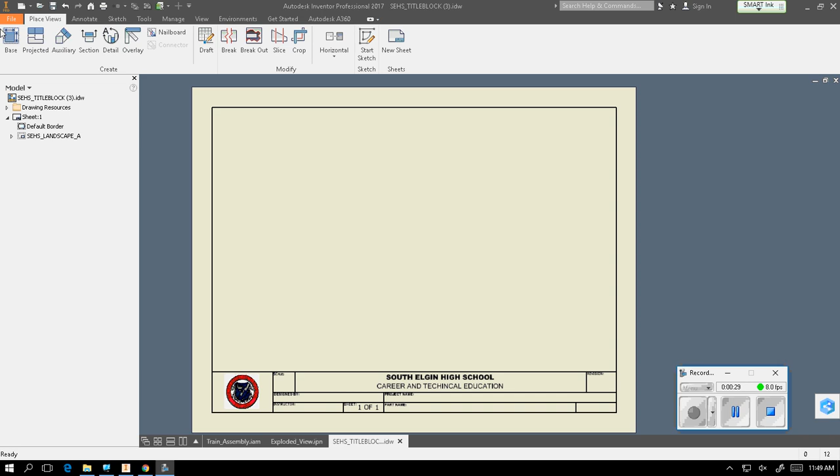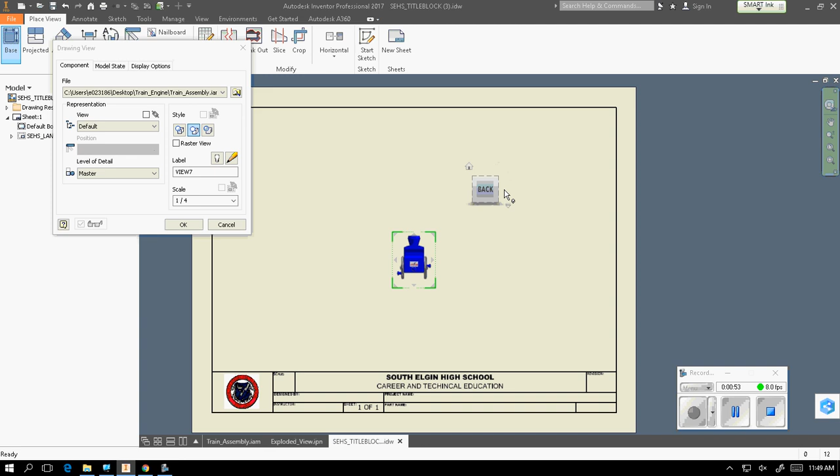So we want to start out with the full assembly first. So I want to go to my base view, and I want to bring in my full assembly, and I am going to make this the front view, okay?

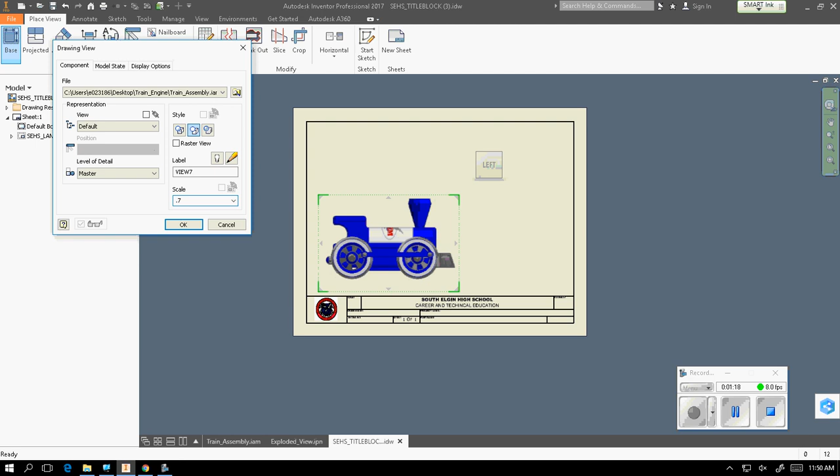And I'm going to change the scale to, let's go 0.75. Let's go 0.7. Yeah, that looks good. 0.6. Let's go 0.6 to 1. So I have my front, my top, my right-hand side, and then my isometric.

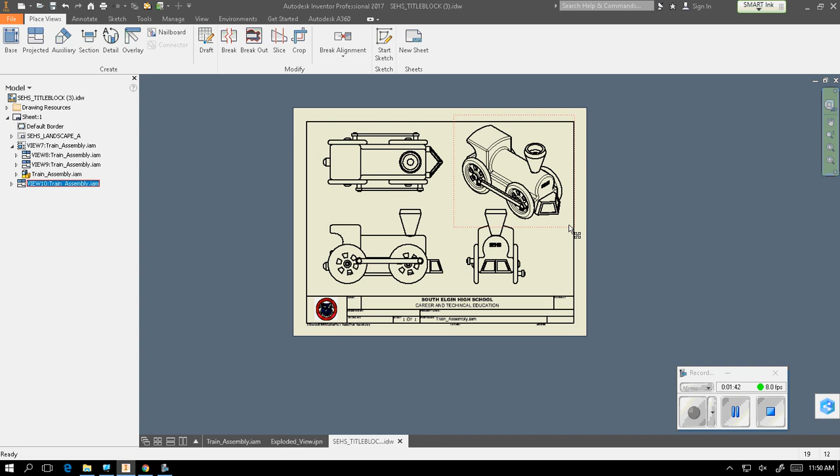And let's see, pull these guys in here so it's inside. And double click this. We want to shade all these views. And there's your full assembly.

Now, the text box did not pop open for this one, so I want to go in here and I want to add my text. December 11, 17. Name in caps. Project title is Train Engine. And instructor, go ahead and write my name.

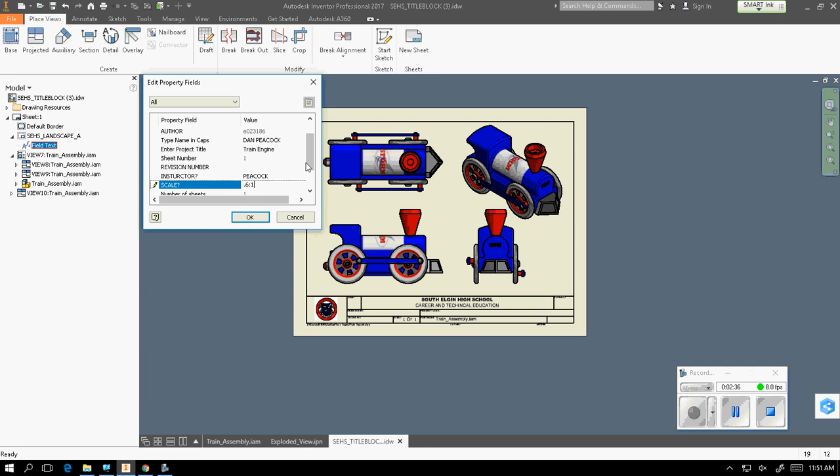And the scale we made was 0.6 to 1. Okay, so now we got all of our text in there. And now we want to go to the next new sheet. Same thing. Put your date. It's 12, 11, 17. Name. Project title. My name. And the scale of this next one, we're going to make that 0.6 to 1 as well.

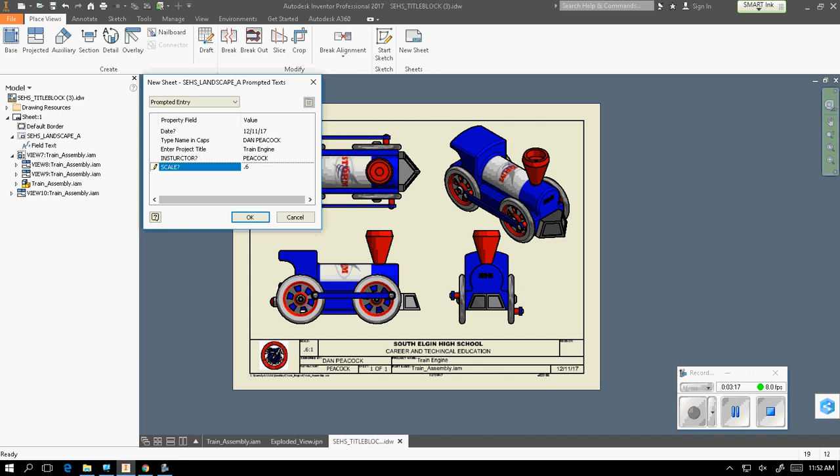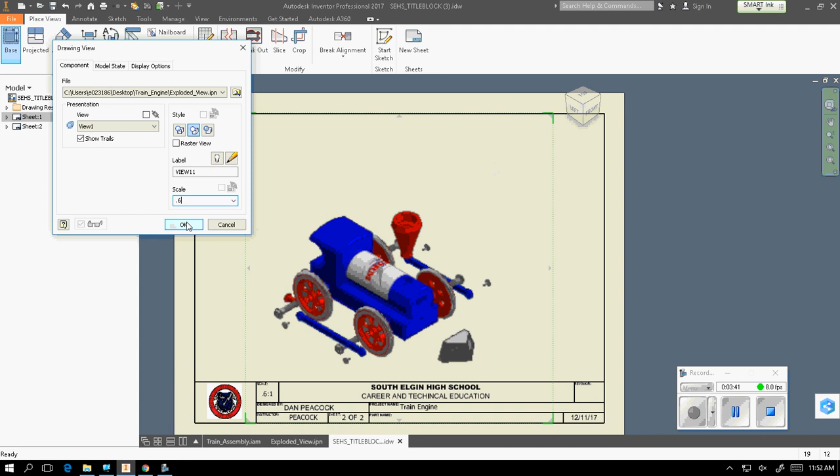Okay, the second one is going to be your exploded view. So I already have that guy here. We want to make it to where it is facing the other way, like that. Let's go 0.6 to 1. Double click, shade. Okay.

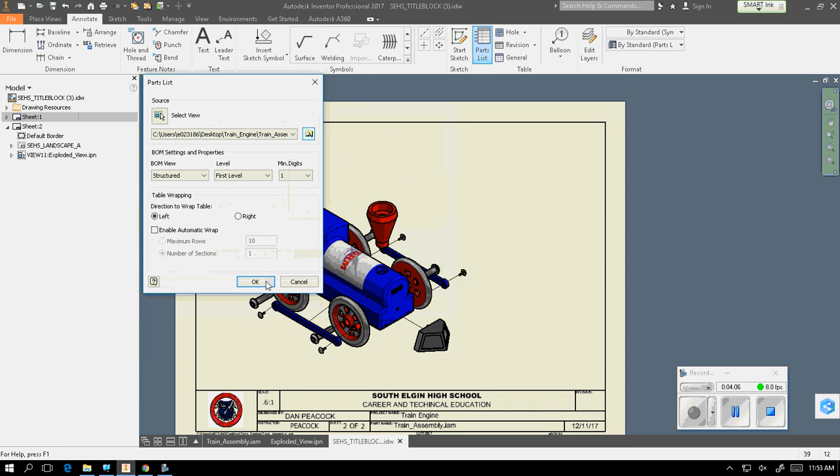Then we want to go to annotate, parts list, go find the presentation, exploded view, okay, put this up in the corner, and then we're going to go do balloons.

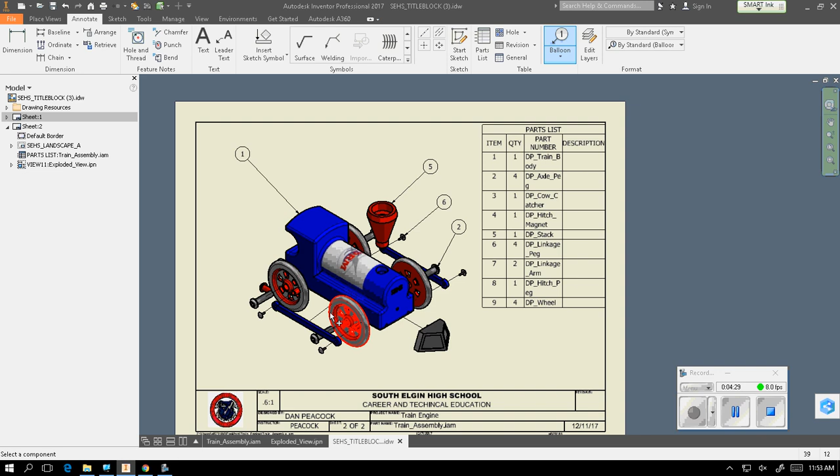So we need balloons for the body, the stack, linkage peg, axle peg, linkage arm, cow catcher, wheel, there's everything. You can't really see the hitch magnet very well, but that's okay. I could go in there and fix that and resave it. It's really not that big of a deal, though. I probably should be able to see it, but not the end of the world.

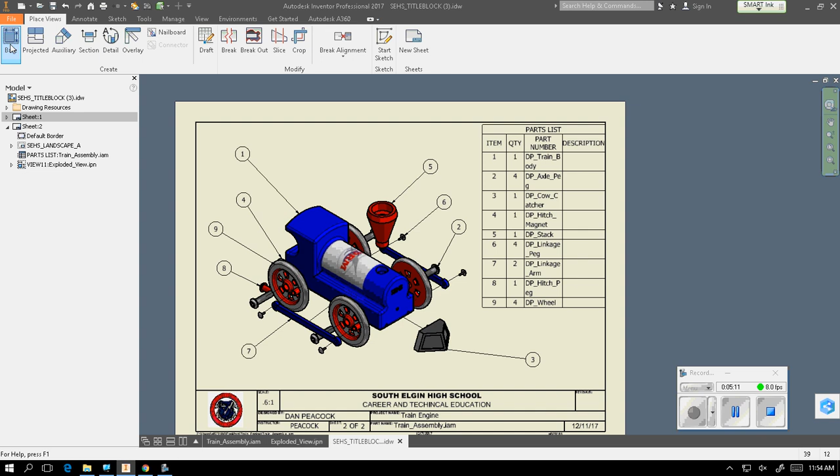All right, so now we want to go back to place views. Base view, we're going to start out with the body. So I want to go in here. Let's find the body. Open. Oops, sorry, I need to open a new sheet first. I know this is a pain trying to rewrite this every single time, but oh well. And the scale for this one, let's go 1:1.

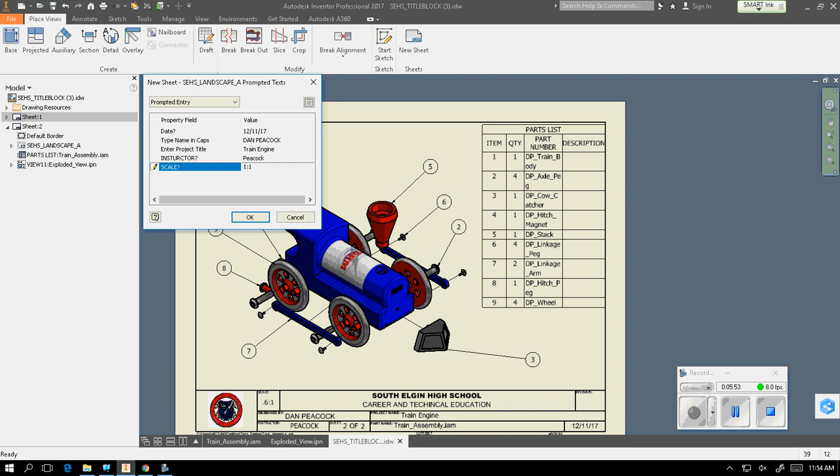If at all possible, you want to make the scale to where you can make it as big as you possibly can while keeping it on the sheet. And let's go in here and find the body, open, front, and let's put it this way with a scale of 1:1.

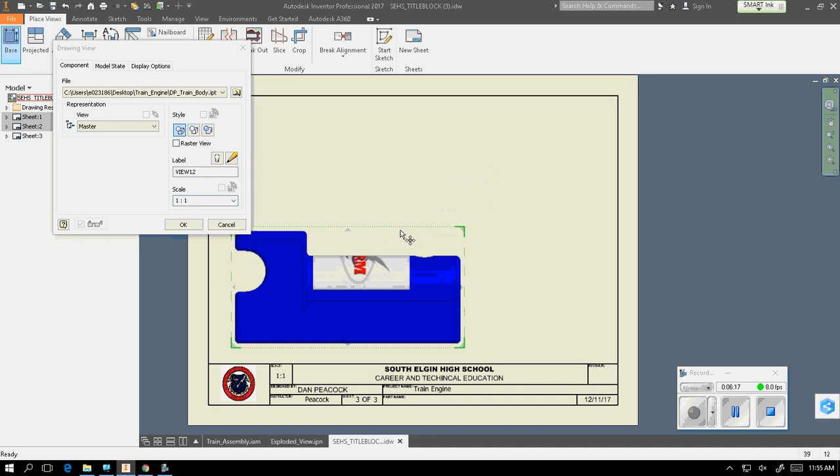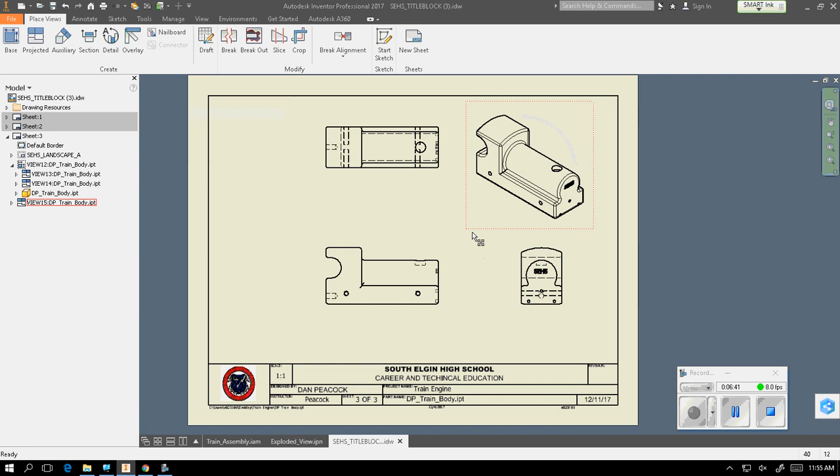Actually, that's a little bit too big. Let's go half. Half is fine. Because we want to do the top, the right side, but this one, oops, I forgot to do a view. If you forget a view, you can right click here and create view, projected view, and there's the isometric. But what we also want to do is project a view

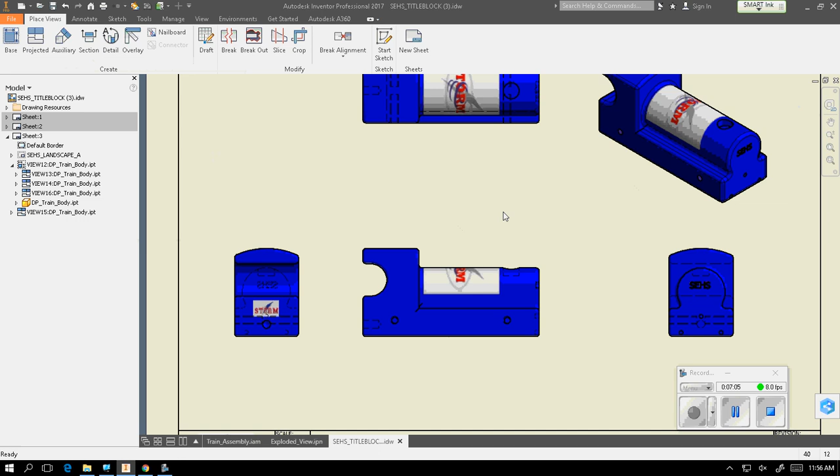of the back, because we have to be able to dimension this guy on the back. Okay, so double click, shade, double click, shade, and there, we're good for the body. Actually, sorry, we're not shading—I made a mistake here. We're not shading this part of it, because when you add dimensions to something, you're not going to shade it. There we go.

All right. I actually want to keep my hidden lines on there. I accidentally unclicked that. Okay, so next one, new sheet.

And the next one, we are going to make the scale—there are actually going to be 3 on here. So let's just leave the scale blank on that one, and we're going to add text, because we're going to put 3 different parts on this one. We are going to put

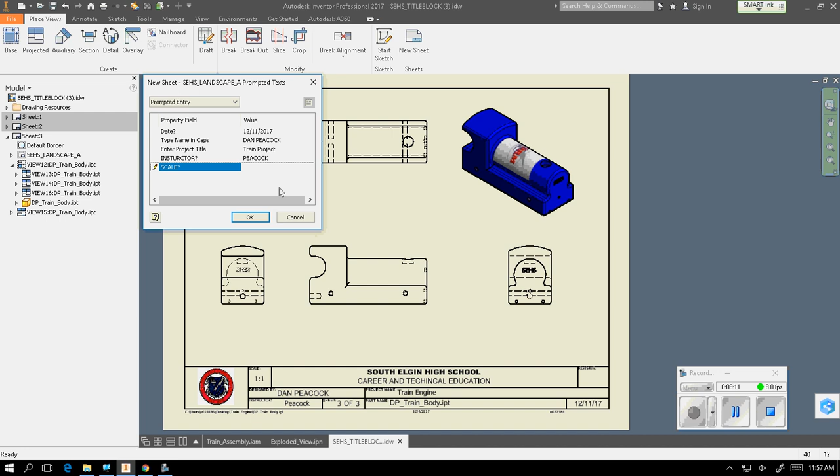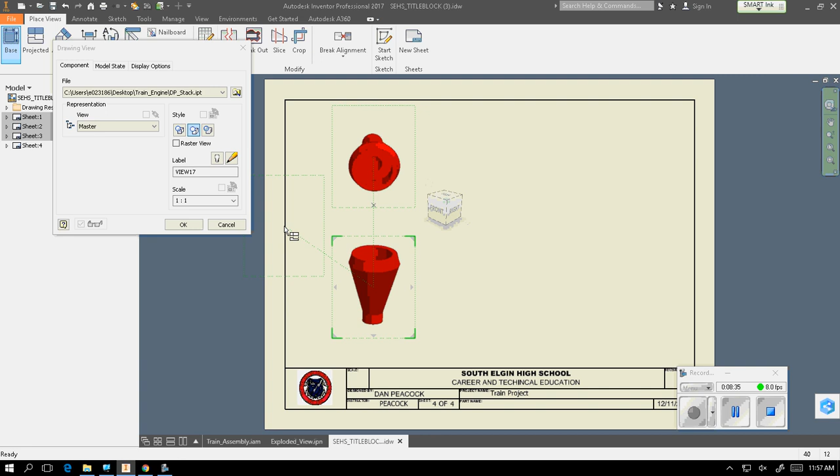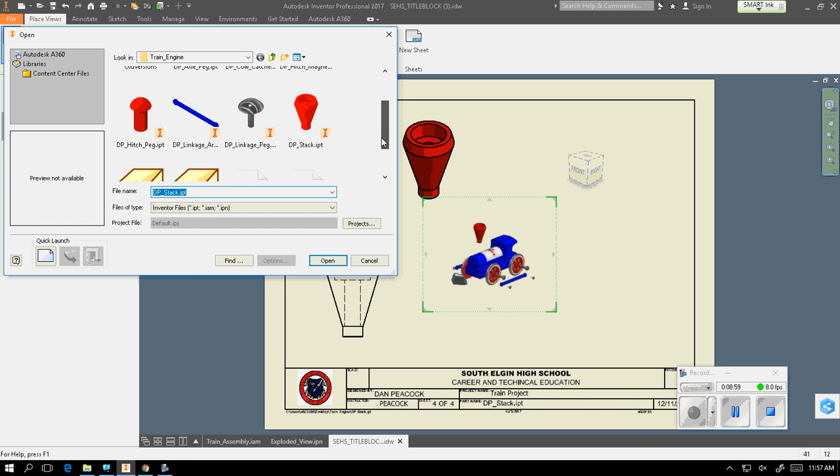And then you're going to shade the isometric. And then we're going to bring in the hitch peg, and we're going to make the scale for this one 2:1.

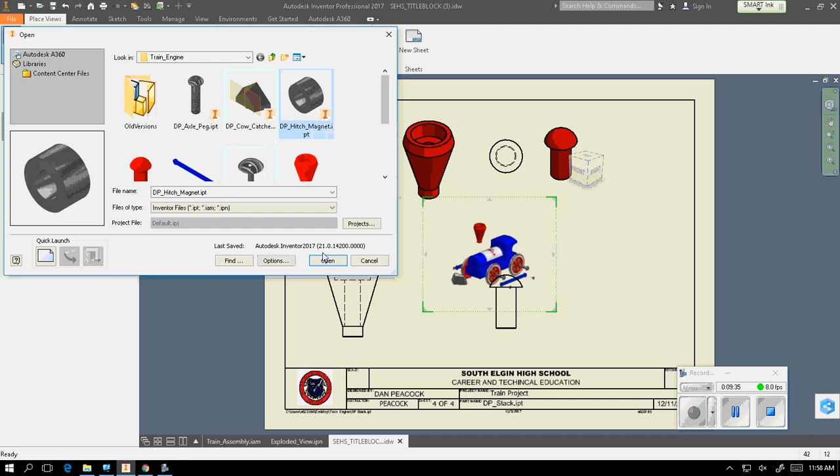Go ahead and shade that. And the hitch magnet. And 2:1 for the scale for this one as well. And we want the front view. That's actually not the front. That's the front. Top. Isometric. Oop. Shade the isometric there.

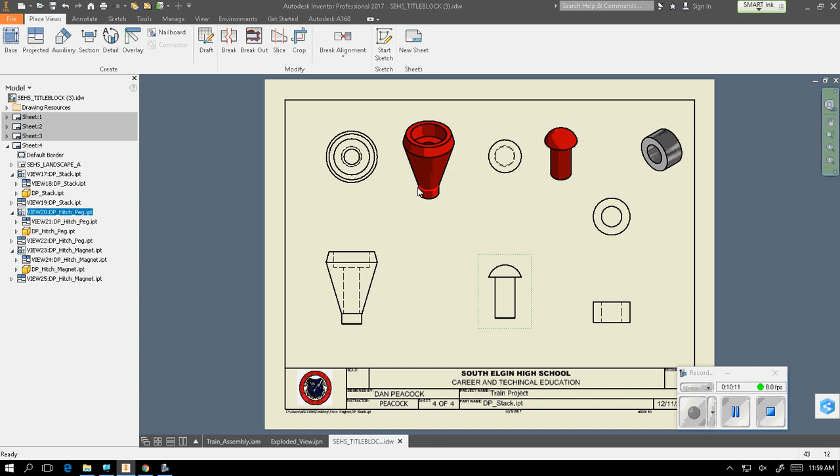And now what we're going to do is, we'll do that on the next video. Okay, so we got these. Now we want to go to new sheet. The next one is going to be the wheel. And the wheel we're going to put by itself because we're going to do a detailed view of that one in the next video.

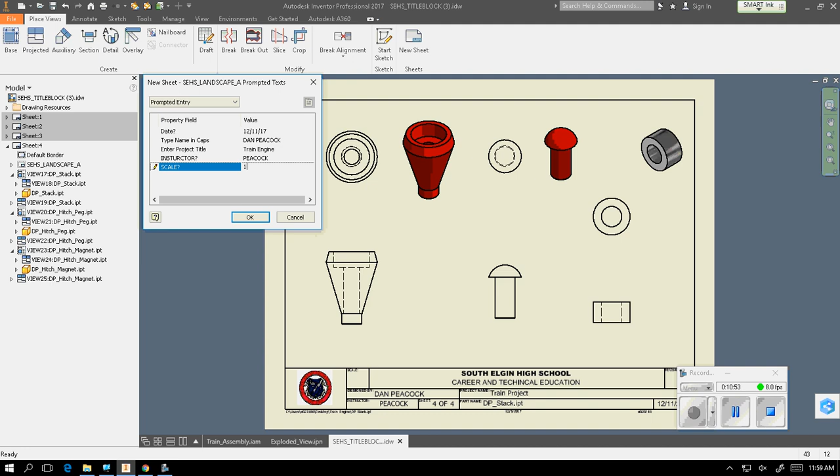So date, name, train engine, instructor, and the scale of this one, let's go 1:1. Okay, and then let's go to base view. We're going to bring in the wheel.

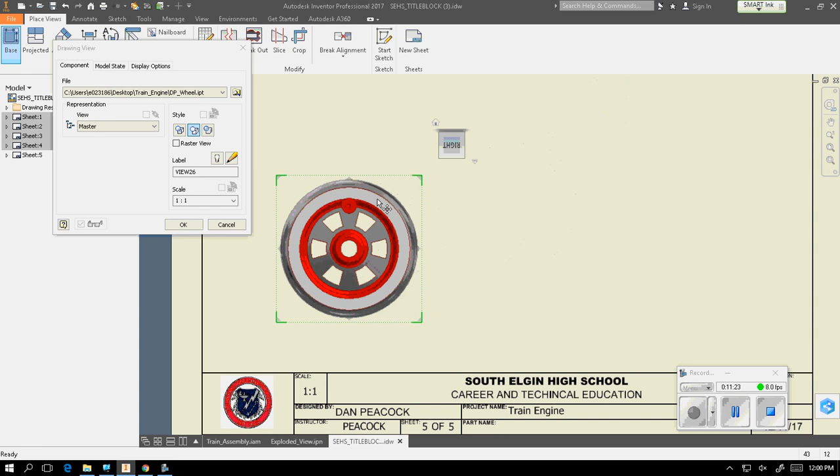When we bring it in, we want to make sure that this little guy is on the top, because we're going to do a section view of this one. So we're just going to do this. Oops. And that. And we're going to add those views in the next video. So we got the wheel in there now.

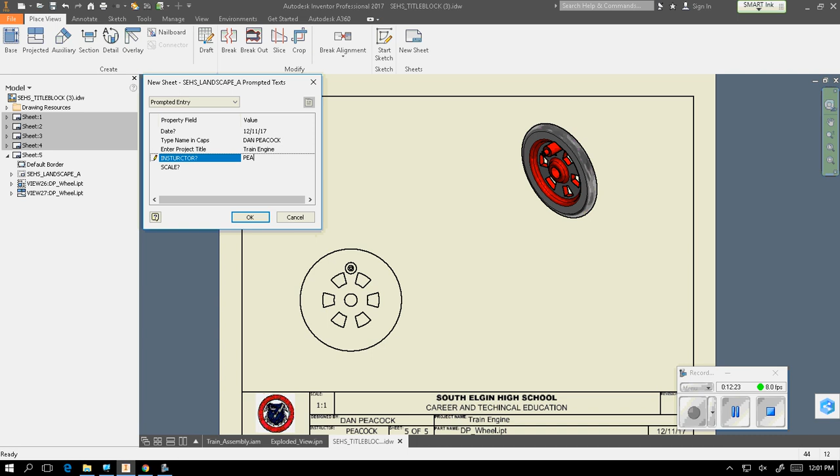Next one, new sheet. The next part we're going to bring in is also going to have a few on a different sheet. So we're going to bring in the axle peg, the linkage peg, and the linkage arm. And leave the scale blank on this one. Okay, so we're going to go to base, not projected, base.

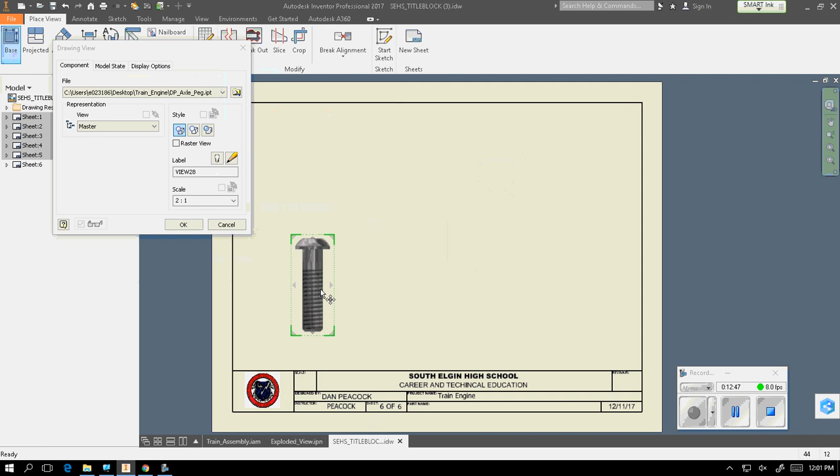First one we're going to bring in is the axle peg. So let's go grab that guy. And 2:1 scale is fine. So we're going to go here, here, and here. Let's scoot this guy over a little bit. Shade this. And then we're going to go linkage peg. So base, linkage peg. And let's go 2:1 on this one too. And put that guy here.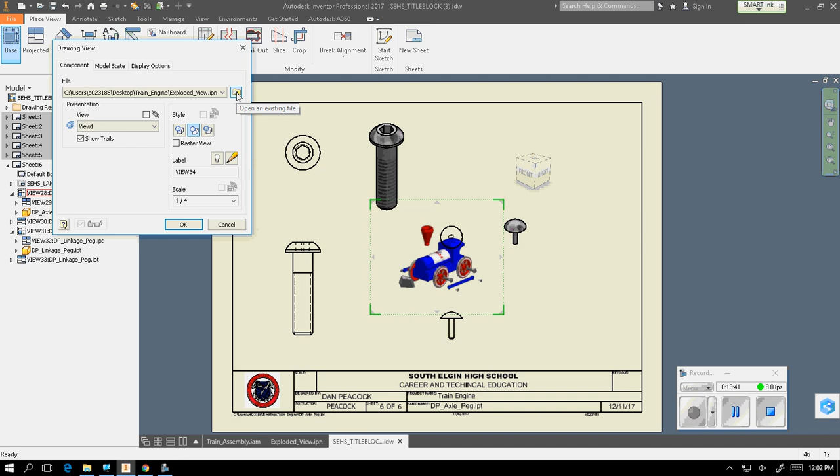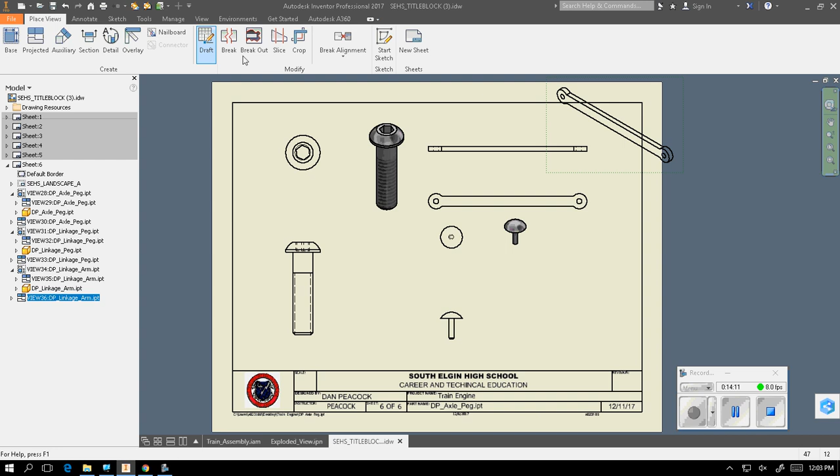And the last one is going to be the linkage arm. I'm going to actually do this on this video so it fits on here right. So when I bring this in, I'm going to make the scale 1:1. And I'm going to put this guy here, here, and here. Now, in order for us to be able to get this thing to fit, we have to do a break. So I'm going to click break, and I'm going to select

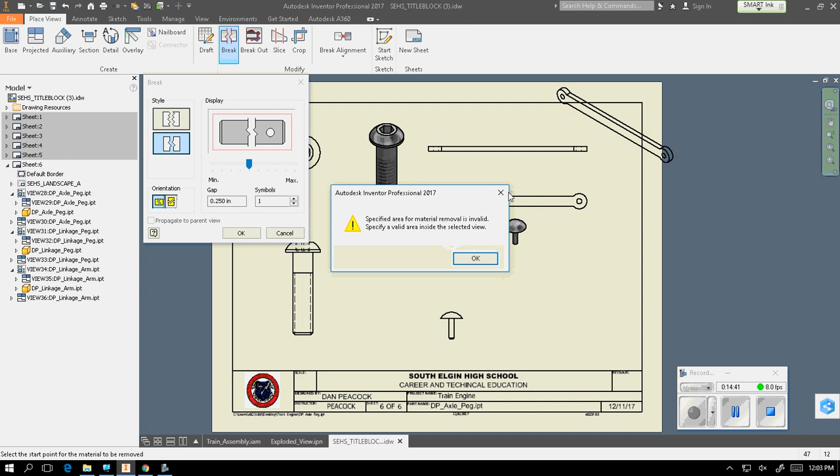Specified area for material removal is invalid. Specify a valid area inside the selected view. What the heck? So break. Come on, man.

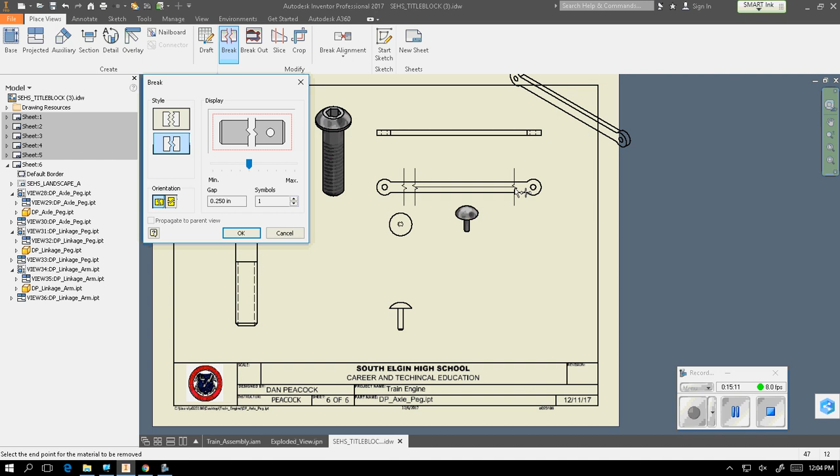Okay, there we go. So I'm going to pick here, and then I'm going to drag it out to here, and it shrinks my view. So when you have something really long, that's telling us between these two breakpoints, it's the exact same thing as from here to here.

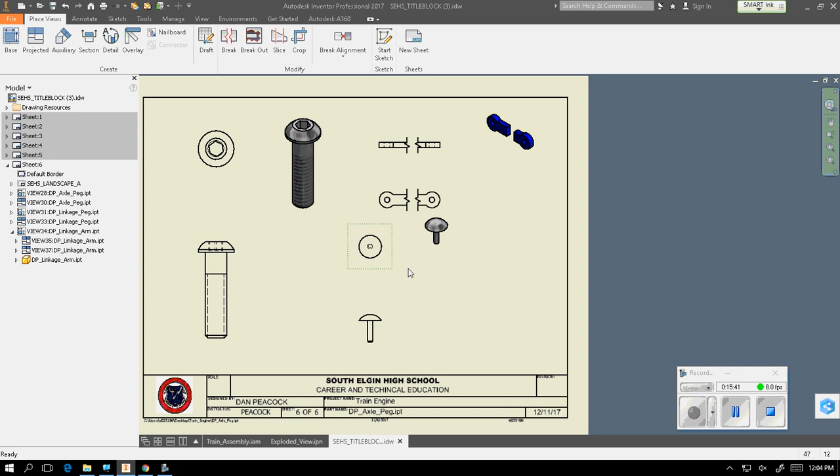So what I want to do is I want to delete this, and I can take this guy and create a view, projected view, and then it puts the break in the isometric as well. So there you have a breakout view of that. And we're done with this sheet. Go to new sheet.

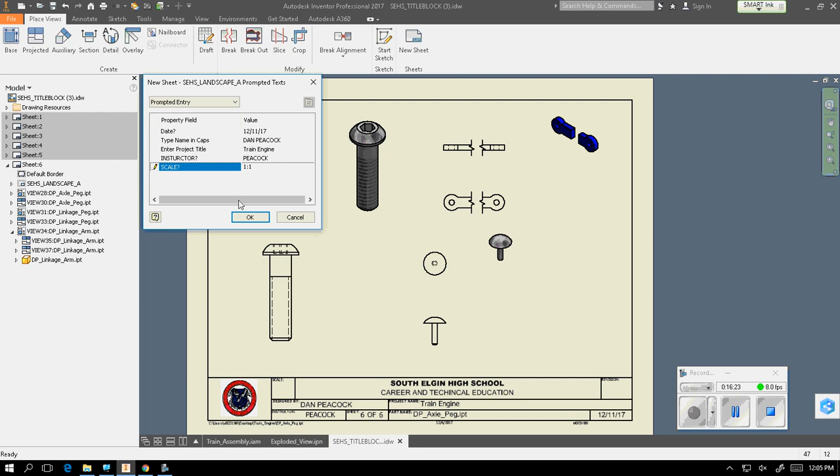And the last one is the cow catcher. We are going to put the date, name, project, instructor, and the scale of this one is going to be 1:1. And the cow catcher is going to be a few different views here. So we want to bring in this, and we want to spin this around and flip that up.

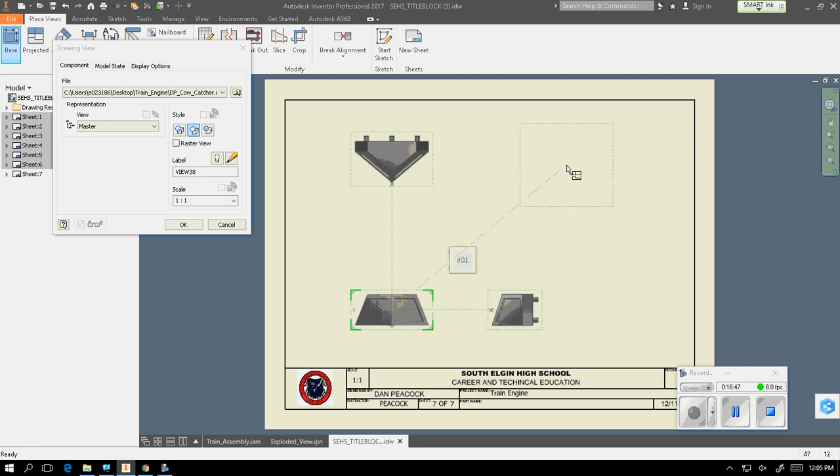Okay. We want here, top, right side, isometric, then right click, projected view. We need the back so we can add those posts. Come on. Create view, projected. Okay. Now, shade the isometric.

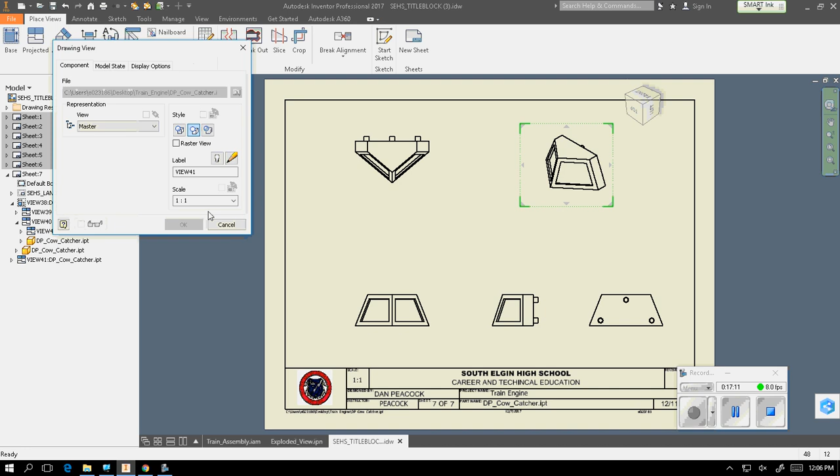And we're done. There is actually going to be one more sheet, but the other sheet is going to be the track. So I'm going to make a video for the track tomorrow, and I'm going to make a couple more videos on dimensioning and setting these up with different section views, auxiliary views, what have you. But that's it for this one.